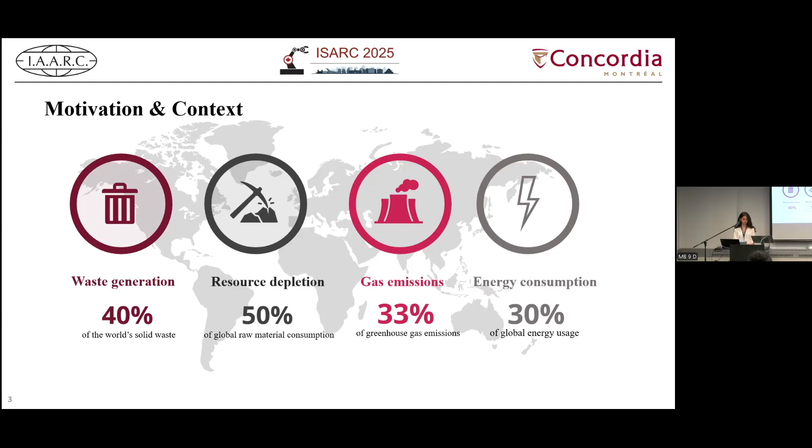So in recent decades, population growth and urbanization have brought serious environmental challenges like global warming. One key contributor is the construction sector. This industry alone accounts for about 40% of world solid waste, 50% of global raw material consumption, and about a third of greenhouse gas emissions and global energy usage. As a result, the construction industry has become a key part of global sustainability efforts.

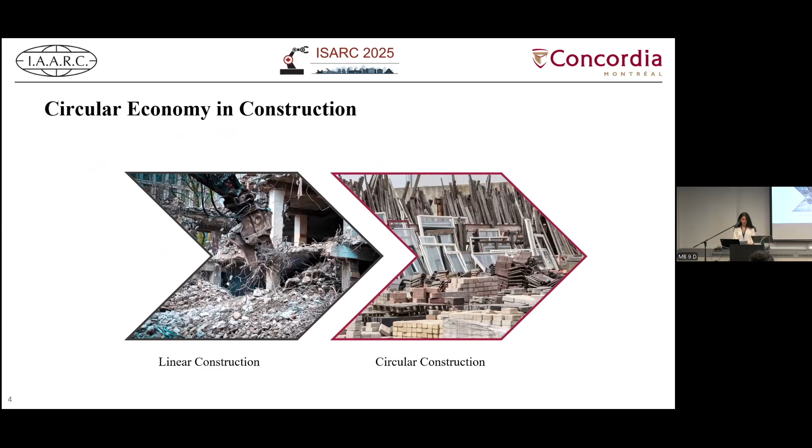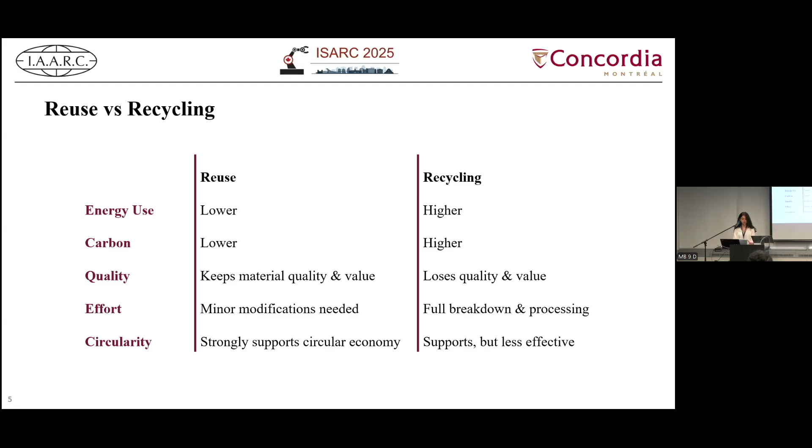One of the key shifts in sustainable construction is the move towards circular construction. The goal of this is to keep materials in use as long as possible, either by extending a building's life or by reusing and recycling. Between the two options, reuse is more valuable than recycling as it keeps building components intact and gives them a second life. It also saves more energy and reduces embodied carbon since the materials keep their original form without further processing.

So right now, reuse is still not a common practice in the architecture, engineering, and construction industry. One main reason is economic uncertainty. Stakeholders often worry that using reused materials could lead to higher cost at the end. Also, the second reason is that the market for these components is not well developed. This means that there aren't enough reliable suppliers and there are no clear standards.

Another challenge is access to information. Designers and builders don't have clear or updated data about which reused materials are available, where they are, and whether they fit into the design or not. And finally, there are design challenges. Reused parts often come in different shapes, sizes, and conditions. This makes the design process harder and can limit the creativity and make the process less efficient.

So despite the challenges, there are promising efforts being done. A good example of this is the work by Brütting and colleagues. They developed a framework for designing truss systems using reused components, which helps to minimize both the total weight and material waste. As a case study, they designed a roof truss for the main station in Lausanne using reclaimed parts from electricity pylons, as you can see in the figure. This smart reuse led to a 63% reduction in embodied energy compared to using only new components.

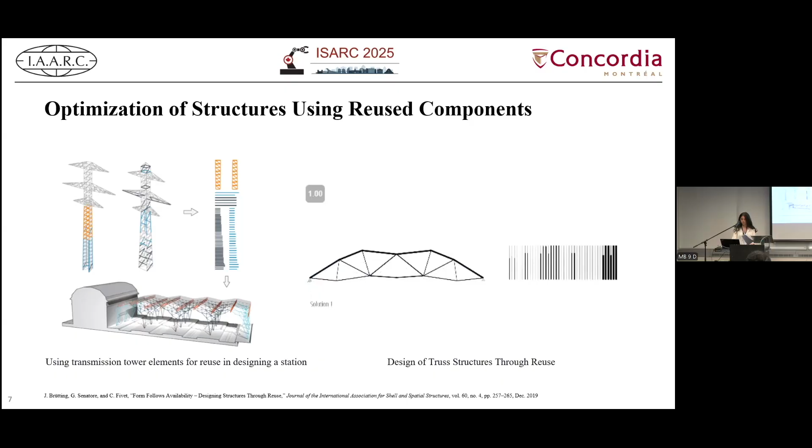So, building on the idea of design for reuse, we can see that existing research has made valuable contributions. However, many of these studies are still limited in scope. They are often focused on just one aspect, such as minimizing material waste, reducing embodied energy, or improving structural connections. What is still missing is a more comprehensive approach that brings everything together: the sustainability, cost efficiency, and effective use of reused components in a single framework.

Also, most existing methods rely on traditional optimization techniques, which can make it difficult to explore more complex or flexible design solutions. To address these gaps, this research takes a step further by introducing a generative design-based framework. Unlike traditional methods, generative design allows us to explore a much broader range of options and weigh multiple goals at once.

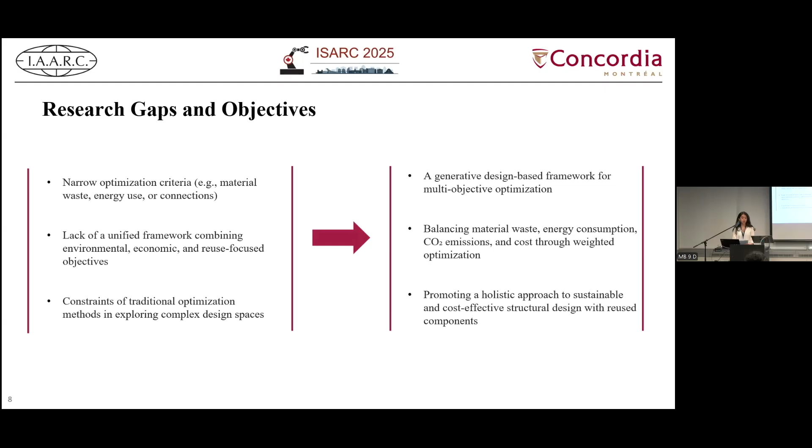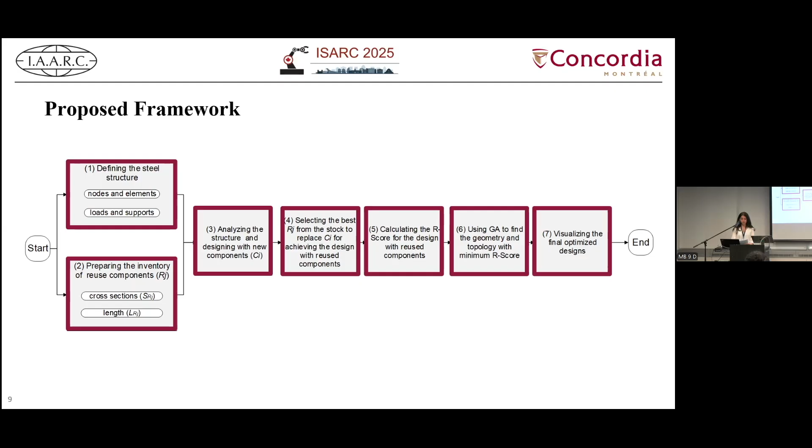As you can see in this figure, the framework follows a 7-step process to optimize the geometry and topology of steel structures. The main goal is to reduce cutoff waste, cost, energy, and CO2 emissions, all while making sure the structure remains safe and practical. It starts by designing an initial structure using new components. Then these new components are replaced with suitable reused ones selected from a predefined stock. At each step, different design alternatives are created and evaluated using genetic algorithms. I will explain the key steps in the following slides.

The first step is to define the steel structure. This means setting up the position of the nodes, how the elements are connected, and the boundary conditions such as loads and supports. This gives us a solid, feasible design to start from. The second step, which can be done in parallel, is to prepare the inventory of reusable components. This includes existing steel elements with known properties like their lengths and cross-sections.

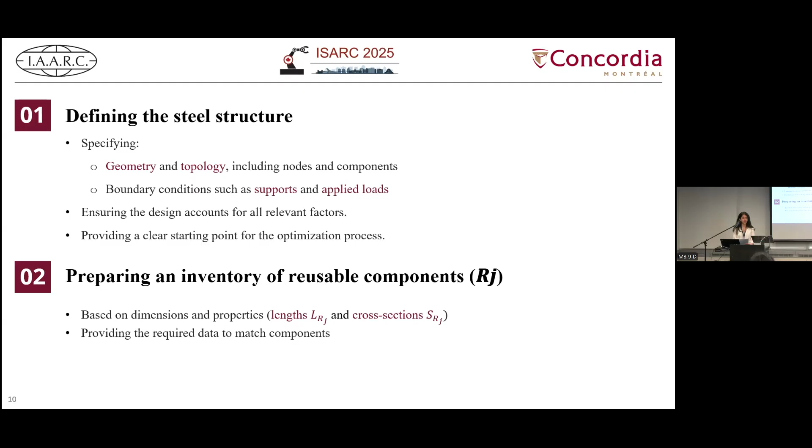The inventory acts as a database, allowing the system to find the best matches for reuse later in the optimization process.

The third step is analyzing the structure. This checks how it performs under expected loads and conditions and gives us a solid reference.

The fourth step is replacing those new components with reused ones from the inventory. The system looks for reused parts that are at least as long and as strong as the original ones, based on their length and cross-section. It chooses the closest match to avoid using more material than necessary.

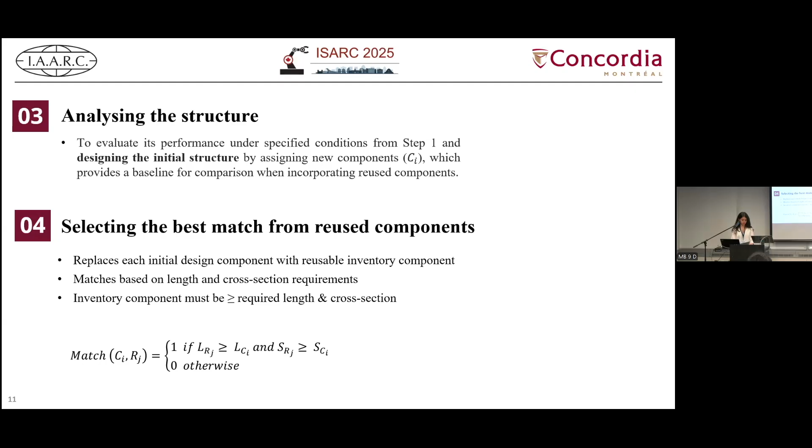Step 5 is evaluating the design by calculating a score that we call the R score. This score combines 4 factors: energy, CO2 emissions, cost, and cutoff waste. Here you can see how the R score is calculated.

All the factors are the summation of the new and reused components. For energy, for new components, we consider the production and transportation. For reuse, we consider the deconstruction, modification, and transportation. And for the total, we sum these two together.

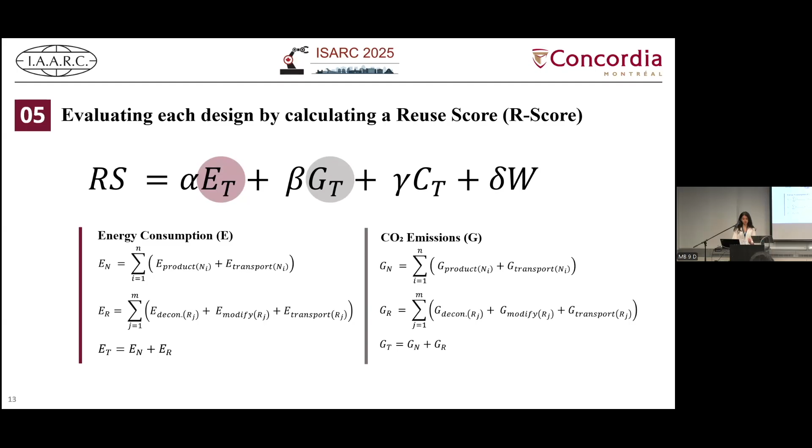Also, for the CO2 emissions, it would be the same in each of these stages. For the cost, we include the production and transportation. For reuse, we include the deconstruction, modification if needed, and transportation.

And finally, the material cutoff waste would be the excessive material that we trimmed because of its being longer or larger than what we actually need.

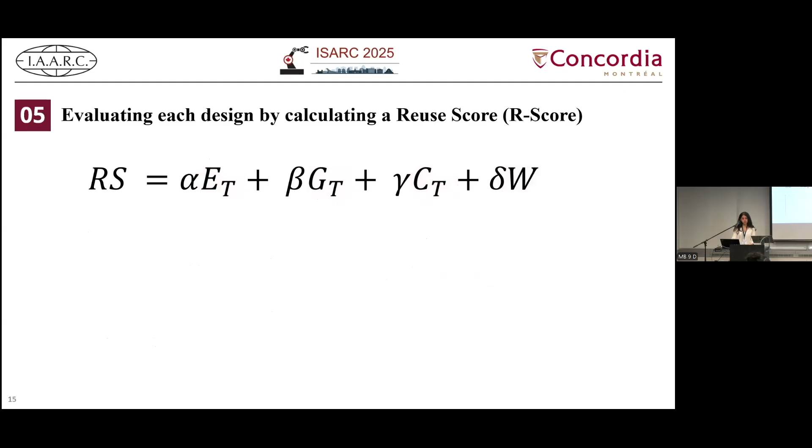Finally, the R score is calculated as the weighted sum of all parameters. Each weight can be adjusted based on what the project values most and specific priorities.

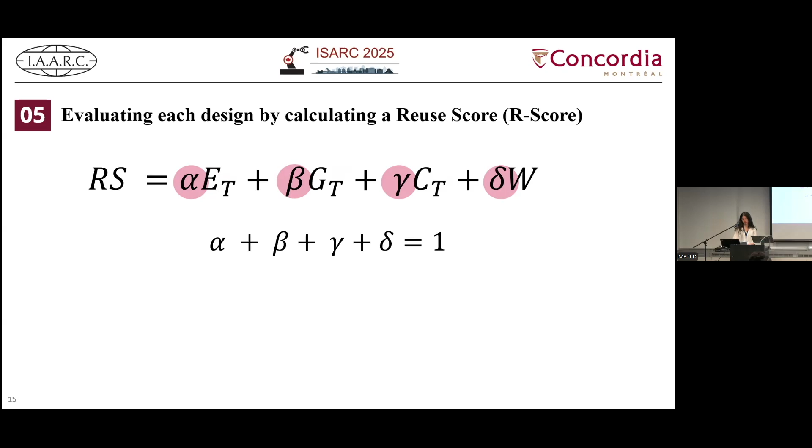The NSGA2 algorithm was used for this optimization. This algorithm begins by generating a population of design alternatives, assigns each one an R score, and evolves them through crossover and mutation. The more sustainable design with a lower R score is selected for the next generation to be evolved. The process continues until there is little improvement across several generations.

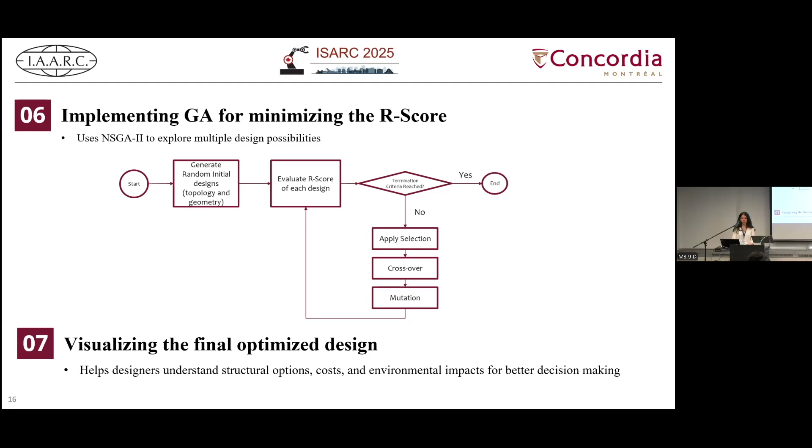The final step is visualizing the design with the highest fitness value. This helps the designer clearly see the structure layout along with the cost and environmental impact, to have more informed decision making.

Now let's go to the implementation. To show how this framework works in practice, we applied it to a case study involving a simple steel structure.

We used Grasshopper and Rhino to optimize the topology and geometry of the structure. We used Karamba for the structural analysis part, which is a plugin in Rhino. Also, we used Galapagos for running the genetic algorithm for the optimization.

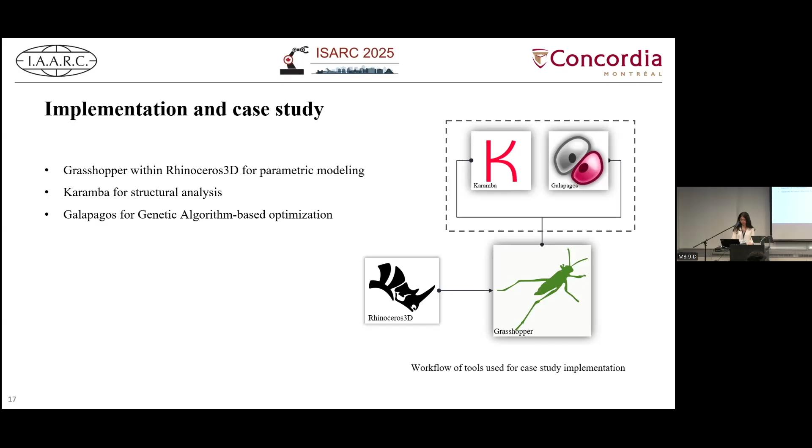For the design, we modeled a 10-meter Warren truss with verticals. There were 5 kilonewton loads applied in the lower chord, and the height was 2 meters, 3 bays, and also we allowed 0.8 meter for the upper chords.

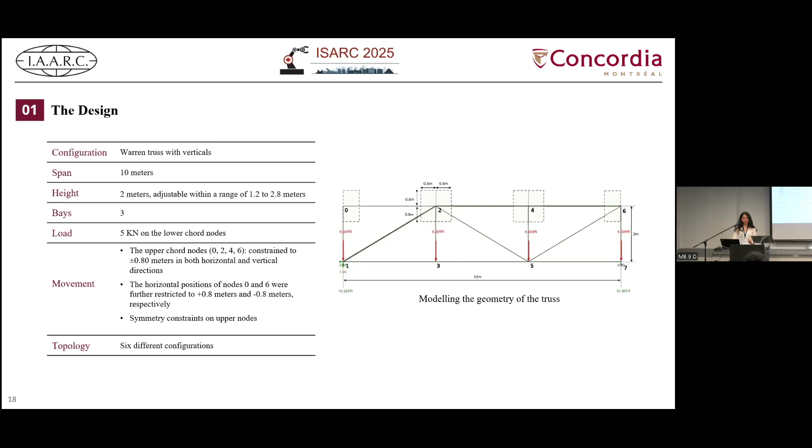And we also defined 6 different configurations to explore more options. The inventory included the types, quantities, and the length of each cross-section.

We used circular hollow section for this case study, and normal mechanical properties were assumed for each of these elements.

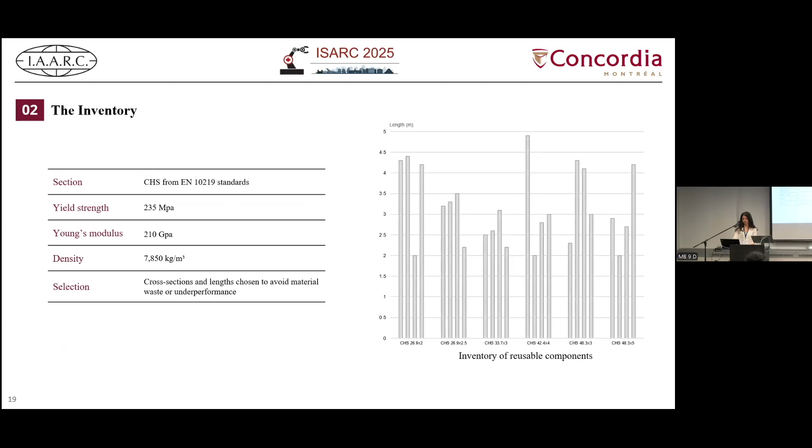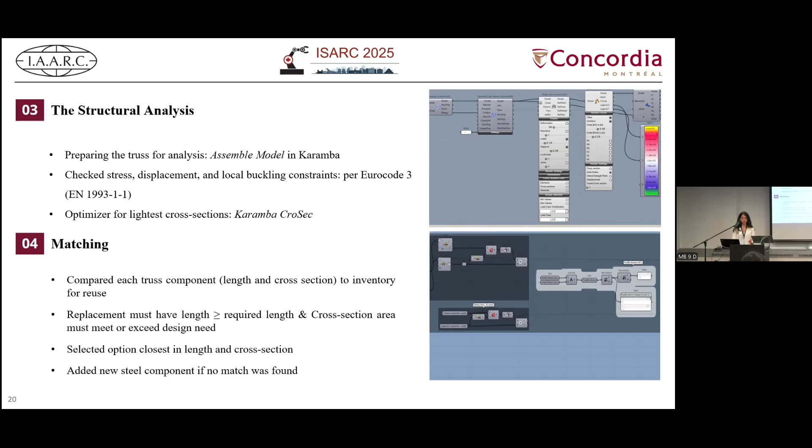For the structure analysis, as I mentioned before, we used an assembled model in Karamba, and for the matching, it was all the same as I mentioned in the framework.

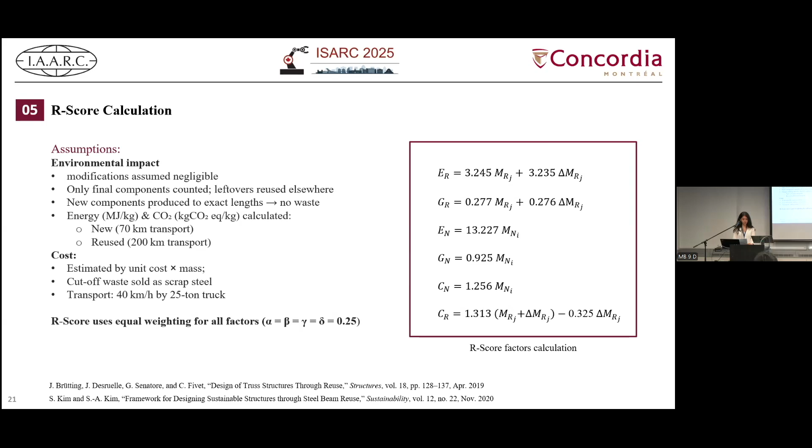So for calculating the R-score, we did some simplification for our analysis. We assume that modification impacts were negligible, leftover material would be reused, and new components created no extra waste. Finally, we gave equal weight to energy, emissions, cost, and waste.

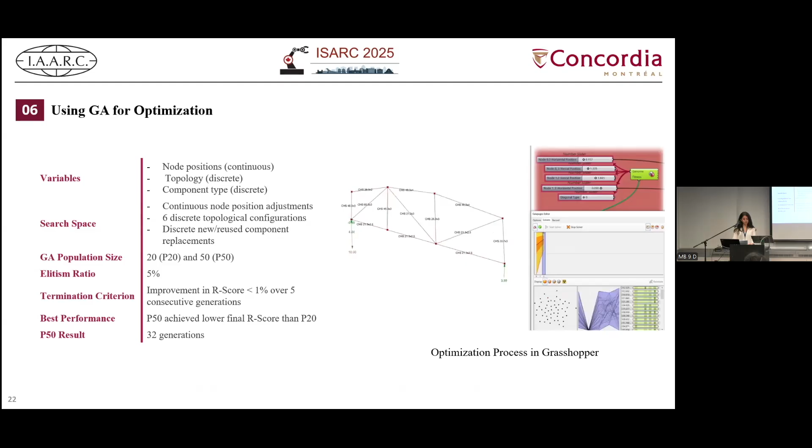For the optimization, we used Galapagos Solver. We tested two populations of 20 and 50, and the search space included both continuous variables like node positions and discrete choices like topology and component type. The process stopped when the R-score improved under 1% for 5 generations.

Finally, we visualized the final optimized truss in Rhino with 13 reused and no new components. We then compared this with the initial design with all new components, and the results were promising.

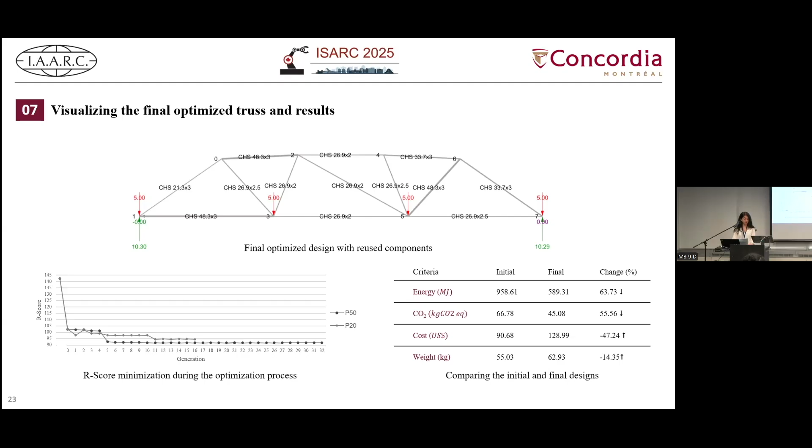In conclusion, this study introduced a generative design framework to support the reuse of steel components in structural design. The results show that reuse can be both environmentally beneficial and economically viable.

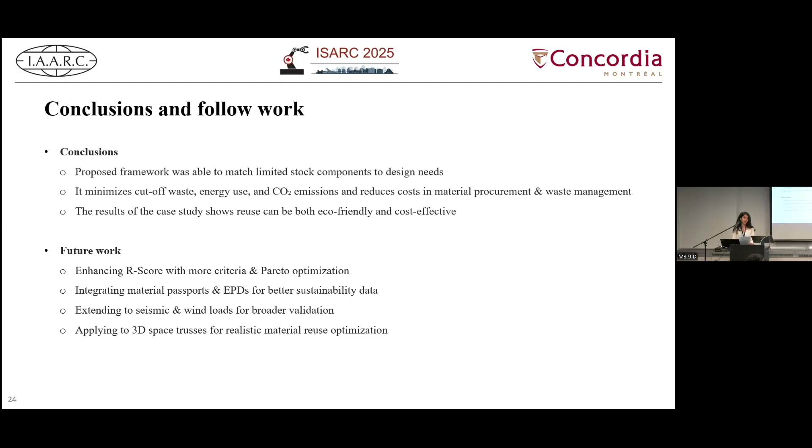However, the case study included some simplified assumptions. Future work will focus on improving the R-score, integrating material passports and EPDs, and extending the framework to more complex applications such as 3D truss models. Thank you.